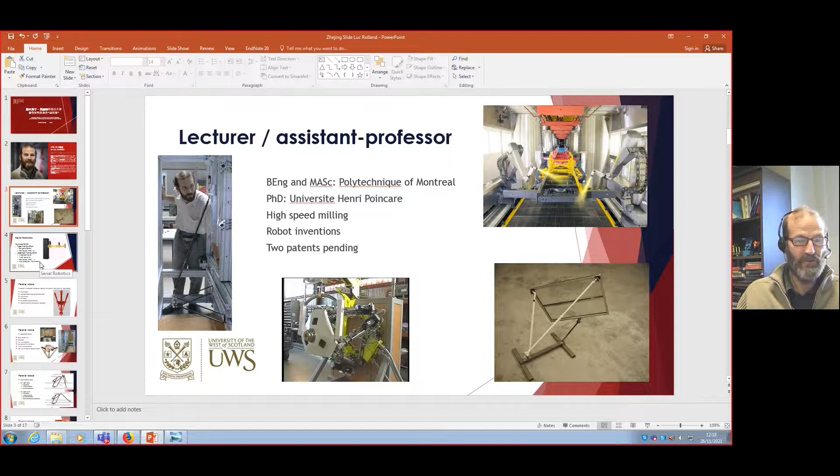And I have 2 patents pending at the moment, the result of the research I'm doing here in Glasgow.

For tube manipulation, for palletization, I would get a cycle time of 6 seconds. Here, the cycle times we're talking about with the ones we did with laser bars is about 1 second, and it's very fast. And it's high precision, 50 microns, over large workspaces.

So we did the first micro manipulation robot over large workspaces. We did it first in the world, really reaching results which are now going into operation in a real industrial process.

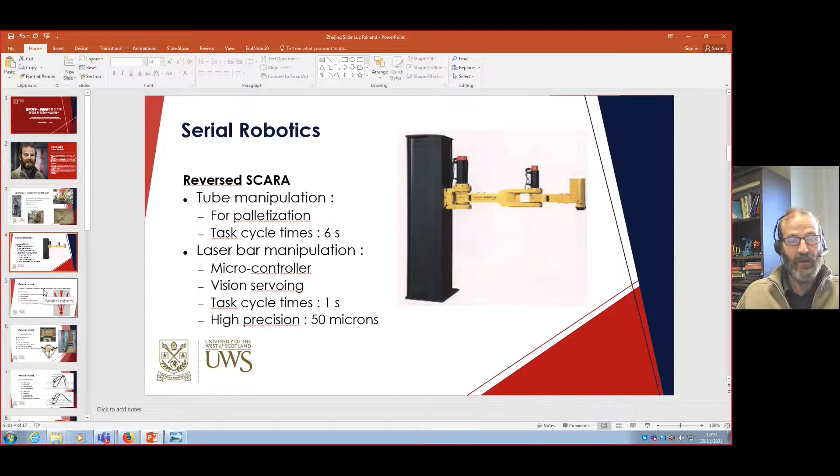Now, parallel robotics is my main subject, which I started to research when I went to Switzerland at the EPFL. The advantages of parallel robots is they are more performant. First, they can handle a large payload to manipulator mass ratio, because they have high stiffness and they don't have much mass since they use parallelism.

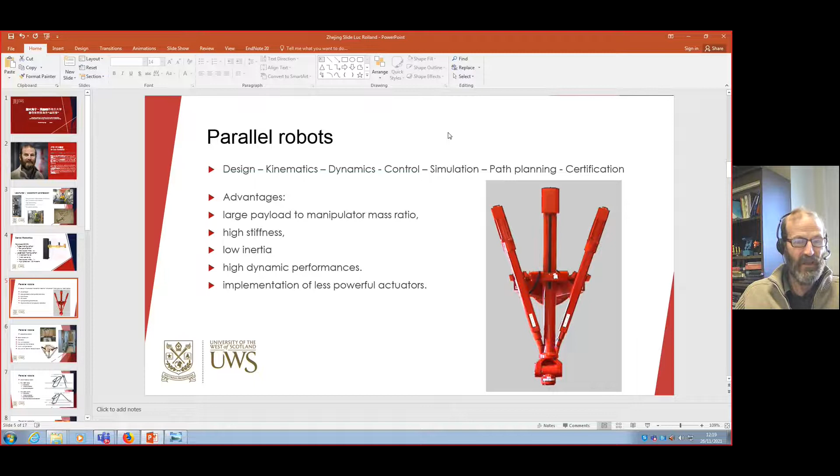And the fact that they are parallel allows them to be a lot less massive, to be very high in stiffness. This means they have low inertia, and then you can send all the energy and torque to the end effector, meaning high dynamic performance at the end effector, and meaning you need less powerful actuators, saving energy and money, and achieving much better results.

Here are a few examples. Those are what we call Schoenflies motion, so translation plus 1 or 2 rotations. These are the robots I worked on when I was in Switzerland at the EPFL, with Professor Clavel.

In the 90s, he was the best in parallel robotics, based in Lausanne, and I worked with him for 2 years. So I worked on the parallel robots here that you see, called the Delta, which became the ABB Flex Picker, and is now copied by every company in the world. And the robot I did with him is the one you see on the right, called the Manta.

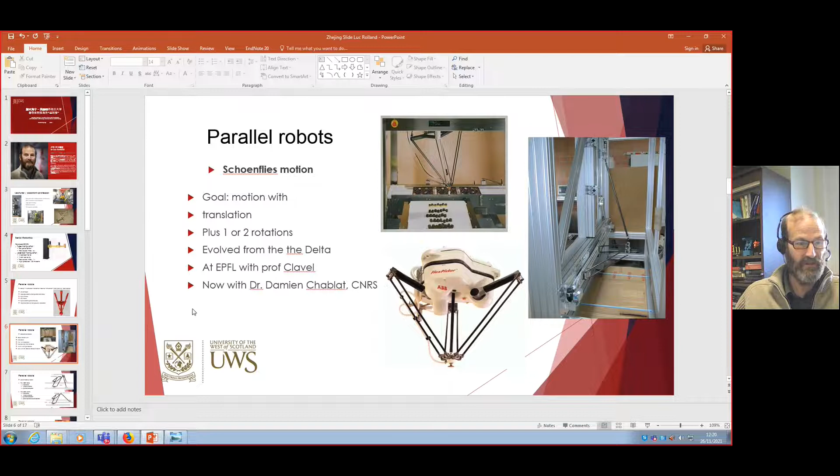And now I work on the design of very important Schoenflies motion parallel robots with Dr. Damien Chablat from CNRS in France. CNRS is another network of very advanced research centers comparable to Cambridge or Oxford and places like that, in terms of levels of engineering and research.

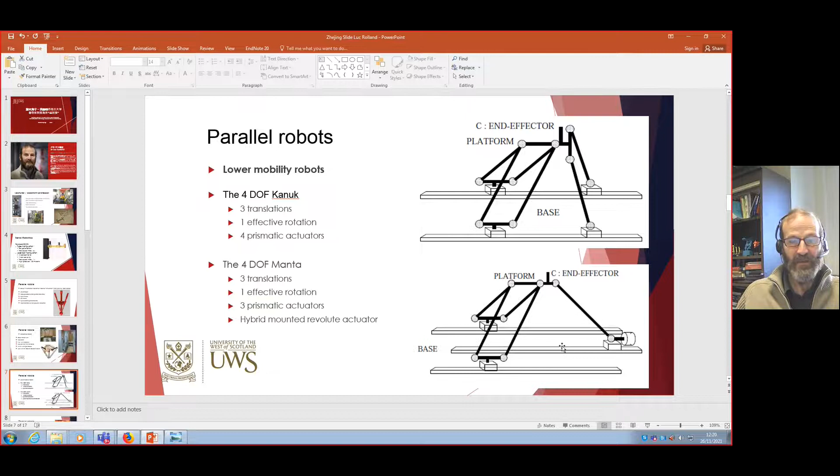I started to work with Professor Clavel on lower mobility robots, the ones you see there, the Kanuk on top and the Manta. I worked with students on a project, and we designed these properly.

That was done by a company, CMW Marioni, and it's used for roughing by Peugeot, near Belfort.

I tried to improve these robots to simulate them, and I provided the first kinematic solver that could solve the parallel robot kinematics problem. It's still the one I worked on.

Not only in computer algebra, and not only in the Grobner basis-based approach, but also with genetic algorithms afterwards, and the work I did in Spain afterwards for the GIM, geometric iterative method. Those are still the best methods in the world.

We worked on path planning and following. I completed the robot simulator, a complete one, the first one.

We introduced CNC controls with line following, with all the paradigms involved. We did position and speed control analysis.

Publications about speed controls are still pending. I haven't pushed those papers out yet, but I can talk about position controls in detail, and papers were published on certifications of tasks and deviation analysis. That's my thesis work.

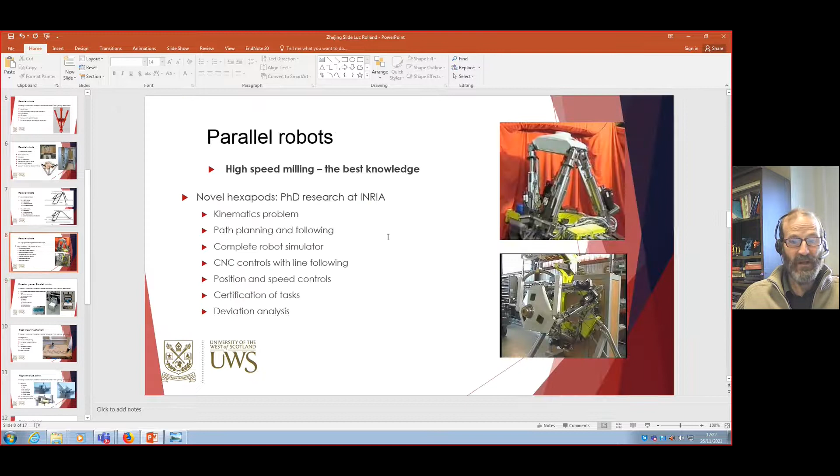Now I came to realize there were problems with these robots, especially in the mechanical designs, because if you want a very good system and want to increase performance, you have to increase the quality of the design itself.

So I went on to different types of approaches. One was to go for cheaper approaches with planar parallel robots, which were not very well exploited at the time. This was when I had some master students in Canada.

It can do all the tasks and activities with the two layers of control that you find in parallel robotics, well and efficiently.

So we achieved simplicity, precision, low cost, microcontroller-based control, without singularities, with high accelerations. We could fill test tubes very well, much better than the very expensive machines sold in the world at the moment, and we could do fast palletizing as well.

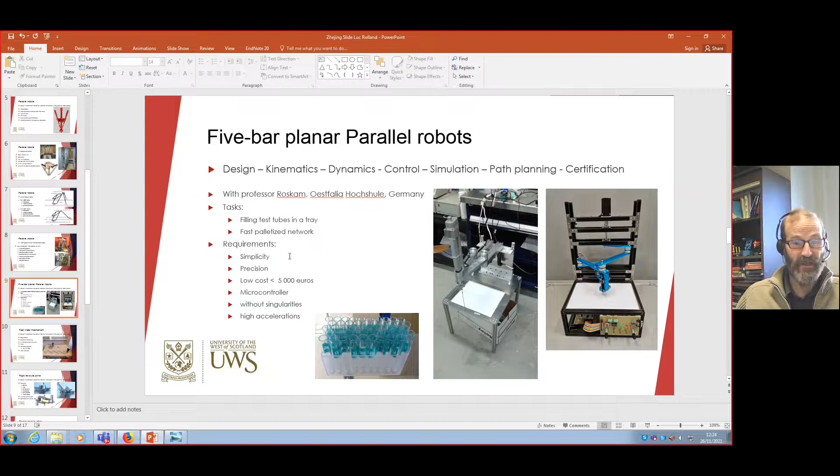We could even sketch drawings very precisely and very efficiently. That's work that I've done.

Knowing that we had problems with some elements of the parallel robots, I tried to design systems to tackle those problems. First of all are the linear axes, which are not very good and produce a lot of errors.

So I designed my own linear axes, which are the result of a deployable structure network. This is very rigid and does a full range of motion.

I have videos showing that in half a second. Full range of motion in half a second for a linear axis, that's unbeatable.

That's very high acceleration. We went up to 15 Gs, but we know we can go up to 20 Gs with these devices, and we could design that appropriately.

You just need to size the motor properly and make sure the bars have good gearing systems and all kinds of bushings.

They're really collinear, there's no issues about linearity. It's working fine, and we worked on the kinematics for that so you could solve them.

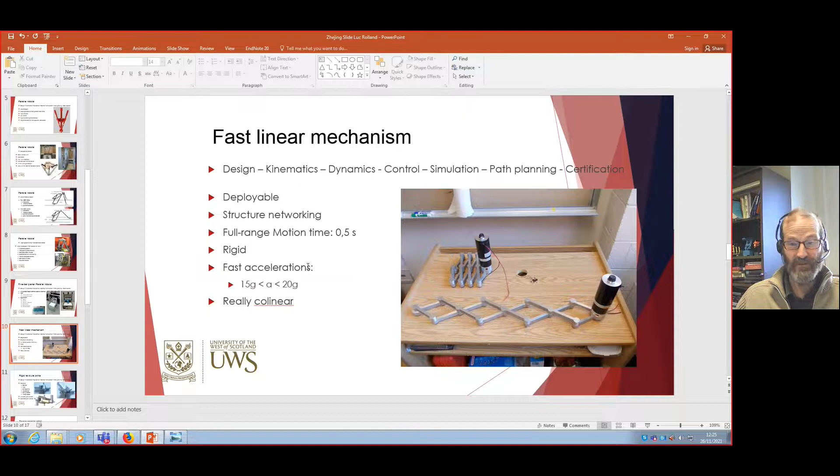Then there was another issue. When I was working at EPFL, I was working with people at ETHZ in Zurich, the same type of school in Zurich.

The guys were trying to build high-speed milling machines, and they tried to design joints but couldn't get them rigid enough, which introduced a lot of bandwidth problems, especially natural frequencies, resulting in poor performance and not enough precision.

So I designed these revolute joints with a student, and they are the most rigid joints you can find. They are conical, rigid, self-adjusting, with no backlash, meaning as you wear out, they readjust themselves automatically.

They are spring-loaded, so you can adjust them with the spring and make sure you design them with a friction you can already foresee, allowing you to apply the types of control to deal with the friction.

We went further and chose the right material for the interfaces to minimize friction. We did a universal joint version, which is sketched here, and we have a spherical joint version as well.

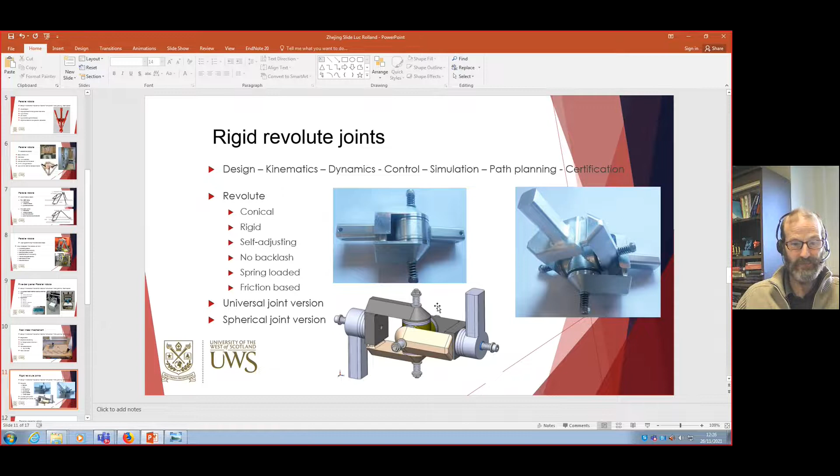Pointer parallel robots - that's another issue I started working on when I was in Cyprus at the Middle East Technical University. People needed energy and there was plenty of sun, so what would be necessary is to go green. The way to go green is to capture that energy from the sun and improve it. One way to improve the capture of energy is sun following with a mechanism that's lightweight, otherwise it's useless.

So I designed a parallel mechanism as you see there. That's a first-hand prototype to show the concept, with very simple parts found around hardware stores. We later designed a pointer for fast scene pointer reconstruction, so you get a device that scans the whole situation and quickly rescans it.

This robot is running and it's a very fast one. It turns like this, very rapidly. It's like the Agile Eye of Professor Gosselin - it's as fast as that.

These are the sketches with the geometric iterative method that shows how we can sketch with this, and it's perfect - you can do the kinematics analysis. And for the controls of these solar trackers, which are very slow and have to follow the sun, we designed a special pulse width control approach.

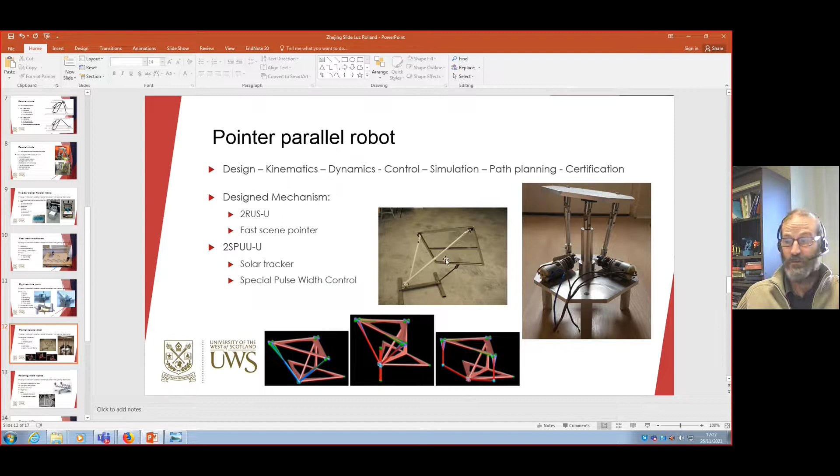Then we went into reconfigurable tripods. I did the robot you see below, which is a 3RPR. And then I transformed the 3RPR with my linear axis.

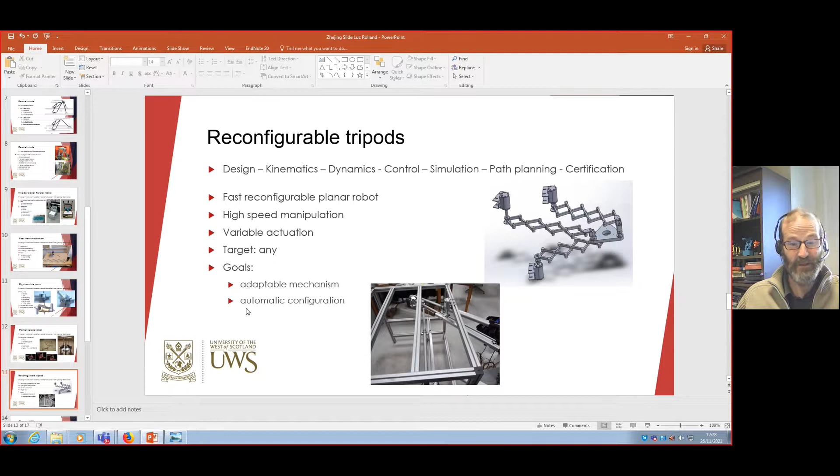This is what we were preparing to do: a fast reconfigurable planar robot for high speed manipulation with variable actuation that can target any task. A robot can do anything you wish, providing you have a proper end effector. The goal is an adaptable mechanism, eventually leading to automatic reconfiguration of robots according to the situation. And then I started to work on drones.

I was invited when I was in Canada, and I had 3 PhD students defend in this area. We started by choosing the right type of drones, because quad rotors are not efficient and shouldn't be used - they don't last very long, and it's an improper use of energy and torque. So you have to go for quad cruisers, like this one done by Airbus.

With these, you have a hybrid approach between fixed wing, where you can last long with the wing effect, and VTOL rotorcraft, so you can land and take off from anywhere without worrying about it, which is actually a very difficult problem for vehicles like this. You cannot bring a normal fixed wing aboard a ship, for example, to go to the Northwest Passage or into the Arctic.

So fixed wing, double wing - very efficient, and that's what I work on with students. I'm trying to optimize these designs and the controls as well, because there are different modes of operation to ensure an efficient use of these vehicles. The performance is for long durations, and they have to be deployable.

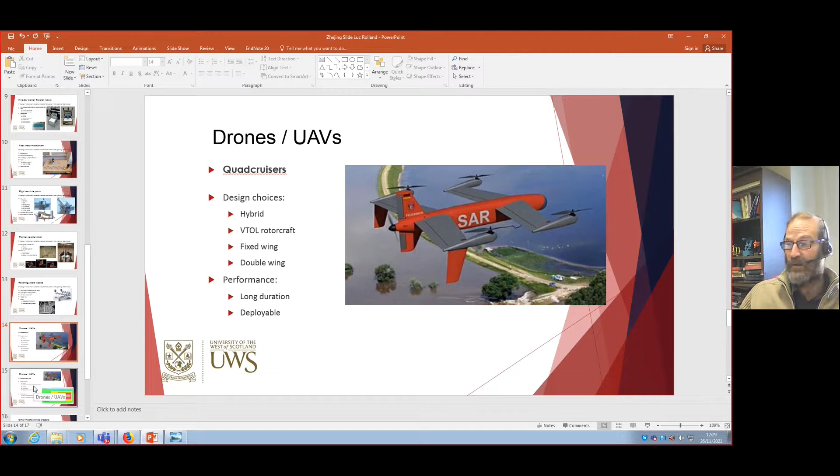I'm even designing a drone aircraft carrier, based on an airship design, with a student. And drones can be used in small venues over cities and in civil operations like watching over and inspecting nuclear reactors, power lines, or windmills and wind farms.

For that, you need a very good vehicle which can do proper sense and avoid, and I've been working a lot with students on this aspect - design choices of sensors, external communications, ADS-B, TCAS, and GPS on these robots, along with controls that are good enough, simulation of those controls, and certification of these vehicles so they can be safe in all instances, including maneuvers for avoidance.

We worked on these different levels of zones. For example, some of this work from one of my students is shown here, and you can see there's a drone here.

I have a PhD student who defended and presented on that topic. Equivalent level of safety is a big consideration, and I can explain and work on that aspect. There's also the beyond line of sight problem, which is not possible to obtain in many countries. The team I worked with in Canada was the first civil team to obtain that right in North America.

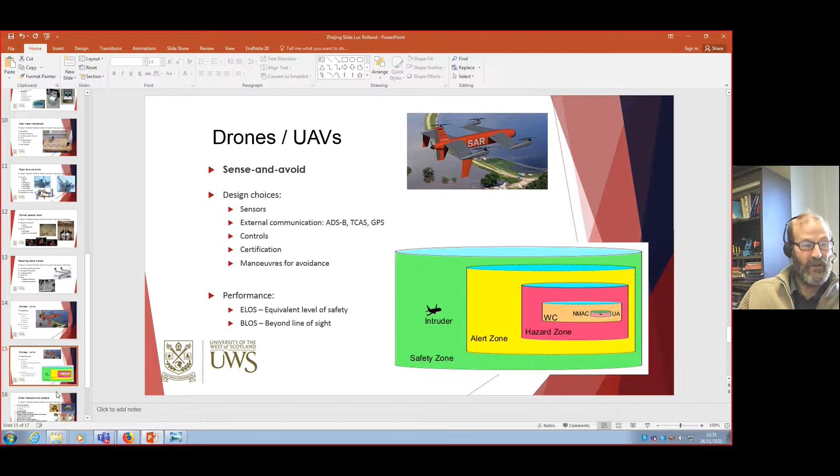Then I worked on bung or cork grippers for the whiskey industry and the wine industry, because we have a big whiskey company here, owned by a French company that also does wine and other spirit making. This involved cask level detection without opening, to make sure we detect which casks are of poor quality. I know how to work with these things, I know how to make that. Also integration of robotic arms and mobile robots - the dynamic factory.

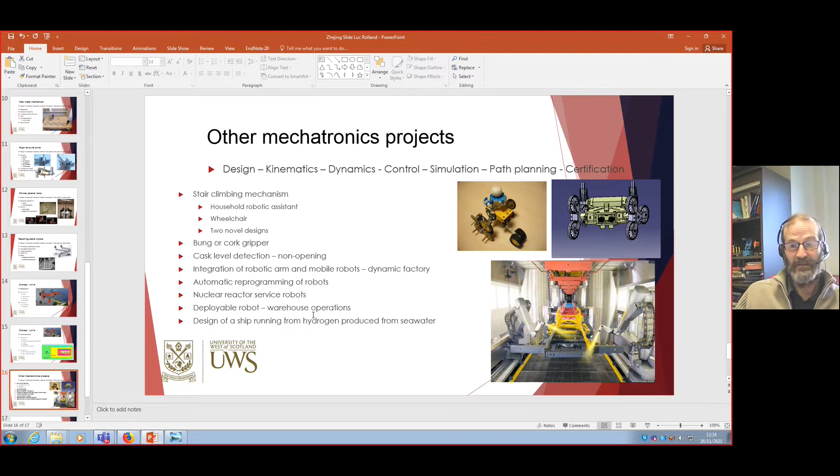Design of a ship running on hydrogen produced from seawater. When I was in Turkey with Toros University in Mersin, I had a client interested in green energy who wanted me to design a ship that could run without diesel, so I designed it for him. The ship you see running around the world with windmills and solar panels - I designed one like that when I was in Turkey, about the same as the one you see, but I showed it in a paper, so perhaps this guy inspired himself from it. But I know how to deal with that.

So if you're interested, I'm a mechatronics expert. I can take a systemic approach to all kinds of problems, because the system is more important than the details - but I also go for the best details. When needed, I can design the best joints, the best actuators, and design some of those things in depth. I can go for kinematic solving, design in solvers like that, and use tools like bond graphs or design of experiments. I have a toolbox of very powerful tools which can be used to improve designs and make them the best they can be, and I can show and use that.